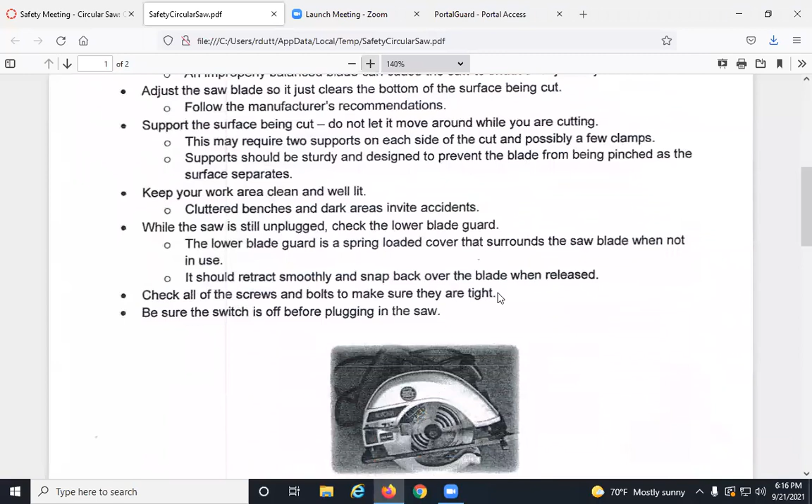Keep your work area clean and well lit. Cluttered benches and dark areas invite accidents. While the saw is still unplugged, check the lower blade guard. The lower blade guard is a spring-loaded cover that surrounds the saw blade when not in use. It should retract smoothly and snap back over the blade when released. Check all the screws and bolts to make sure they are tight. Be sure the switch is off before plugging the saw.

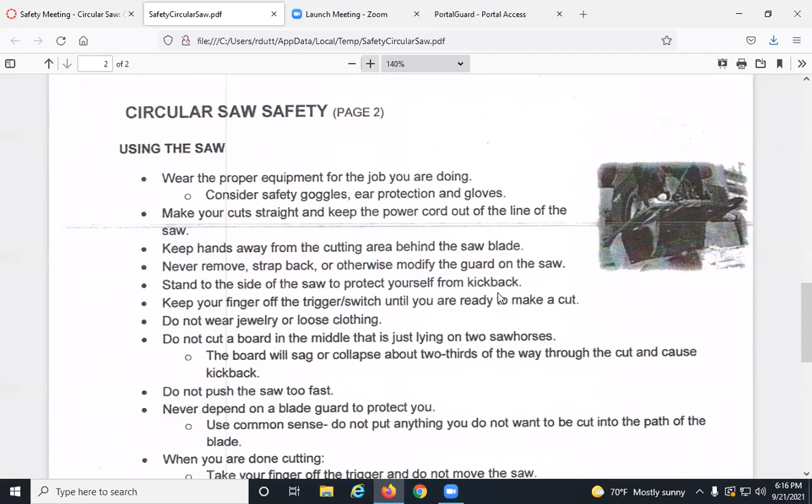Okay, how about Claire using the saw? Wear the proper equipment for the job you are doing. Consider safety goggles, ear protection, and gloves. Make your cuts straight and keep the power cord out of the line of the saw. Keep hands away from the cutting area behind the saw blade. Never remove, strap back, or otherwise modify the guard on the saw. Stand to the side of the saw to protect yourself from kickback. Keep your finger off the trigger or switch until you are ready to make a cut. Do not wear jewelry or loose clothing.

Okay, let's have somebody else. Evan: Do not cut a board in the middle that is just lying on 2 sawhorses. The board will sag or collapse about 2/3 of the way through the cut and cause kickback. Do not push the saw too fast. Never depend on a blade guard to protect you. Use common sense. Do not put anything you do not want cut into the path of the blade.

When you're done cutting, take your finger off the trigger and do not move the saw. Let the motor and the blade come to a complete stop. Never lift or move the saw from the cut while it's still running. Remember, the blade coasts to a stop after the switch is released. Be aware of the necessary time it takes for the blade to come to a complete stop, and don't let it brush up against you.

Okay, Tyler: Kickback. Kickback is a sudden reaction to a pinched, bound, or misaligned saw blade, which causes an uncontrolled saw to lift up and out of the workpiece towards the operator. If you feel resistance and notice the motor wind down, take the following steps: stop forward motion with your saw, release the trigger, and hold the saw steadily in place until the blade comes to a complete stop.

And in conclusion, in order to stay safe when using a circular saw, remember to use common sense. Properly prepare to use the saw and use the saw properly. Doing so will help you avoid dangers such as the consequences of kickback. It'll also help you work more efficiently and, with luck, keep your fingers on your hand where they belong. Lights, please.

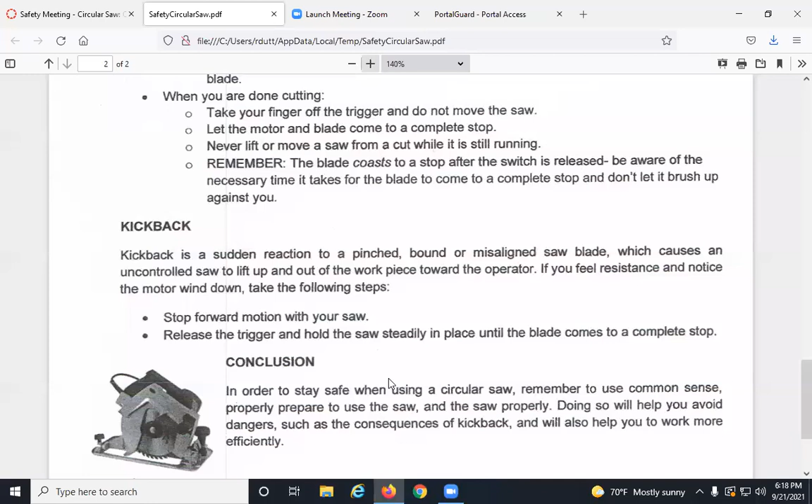So yeah, we could do a whole class on that saw. But the things I want you to remember, if you're not familiar with worm drive saws or circular saws...

This is a Skilsaw, and people call it that like tissues and Kleenex, right? It's just a brand of a 7¼ worm drive saw, heavier than all get out. It's kind of the standard in the industry.

Those Makitas, are they this heavy? I don't think they are. But anyway, don't peg your guard. So many guys put a shim, or tie a wire, or peg their guard, because you have to engage that guard when you're cutting something.

It might hinder the beginning of your cut slightly if you're not careful, so I usually peel it back when I start, and then when it gets going, I let it go. Never peg your guard, because by pegging your guard you've got a super dangerous condition.

Even if it's not plugged in, it's a condition where if you just brush yourself like that, you could really do horrible damage to yourself. And God forbid, because you're working down here a lot, and this is where your femoral artery is.

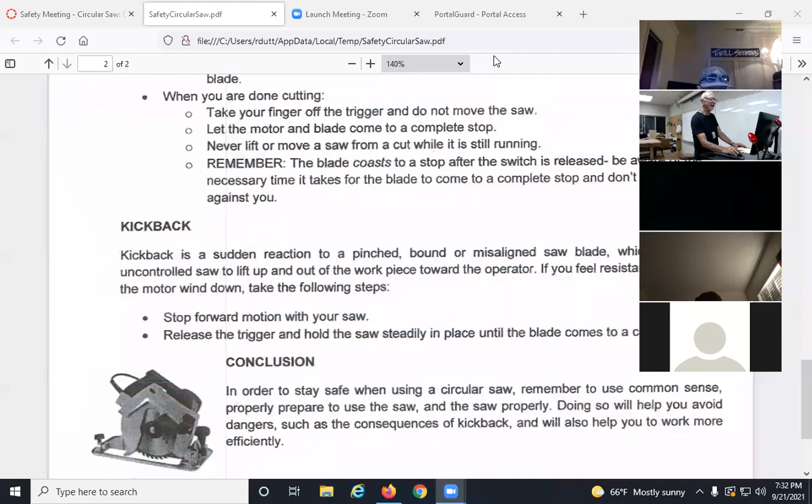Did you talk about it with Mike, who was here the other day? I did a little bit, but he doesn't really care. Yeah, he doesn't want to be involved, doesn't care at all. He just wants it done. Yeah, he wants it done. I think he's got enough on his plate.

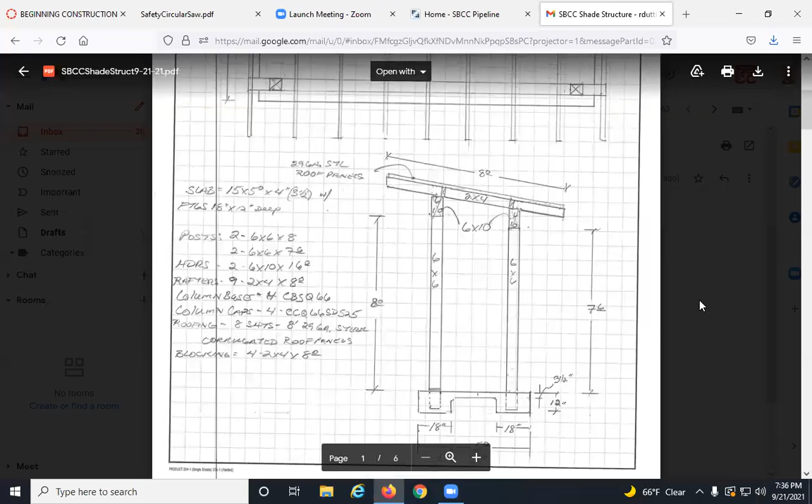I drew the slab 15 wide, by 5. The other things you see are 6 inches in, and 6 inches in is the start of a 6x6 post—6 inches in, 6 inches in, and I'd probably put a 6-inch dimension there if I didn't get to it already. I didn't show it there either, so yeah, I would flesh that out. Those are the 2x4 rafters, there's 9 of them, on approximately 2-foot centers, to use this corrugated metal roofing.

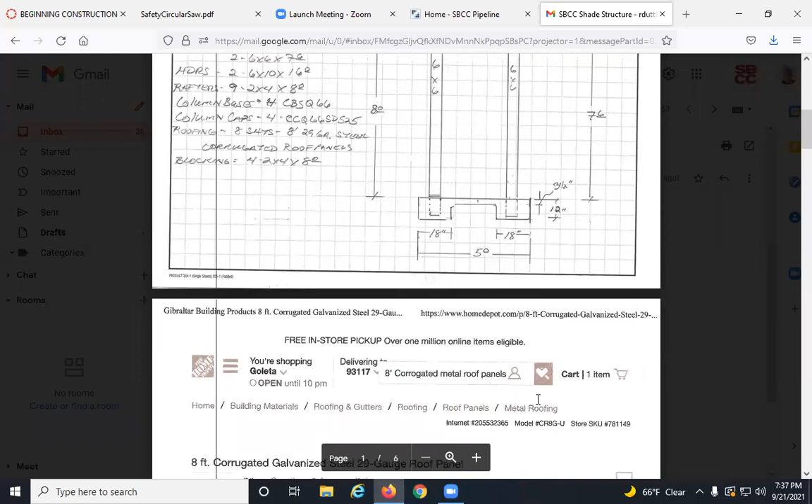I brought it in 6 inches, and the reason why I did that is 3 inches is the minimum for this embedment. So right there—I didn't draw them—but those posts, those 6x6 posts, would be fastened to the concrete with what's called a CB, or column base.

This is a CBSQ. And CBSQ is not that column base, but that column base. It's a CBSQ 66, SDS 2.5 for purposes of argument, and it's right down somewhere.

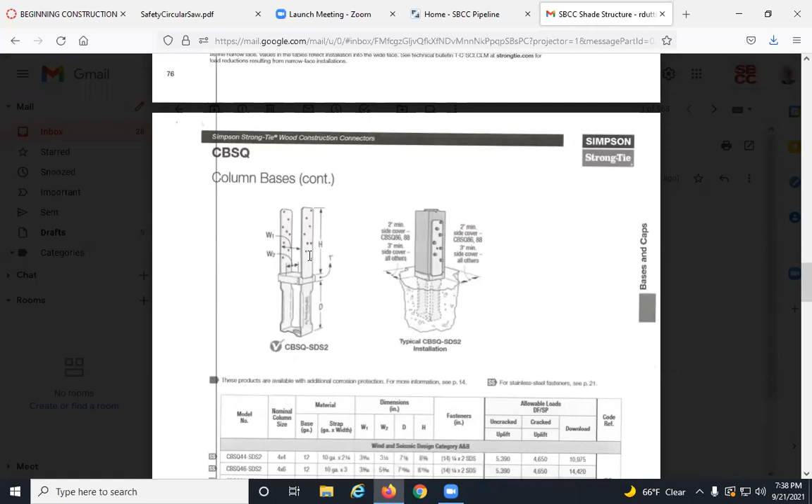This is an SD because this goes down into the concrete. It shows it there in the concrete, 3 inches minimum away from each edge of the slab. And then this flange, if you go down and read the H, that's the H dimension on the flange. It's up 8 3/4. So 8 3/4 up is this flange, and that flange is bolted to the 6x6 with SDS screws, as opposed to through bolts or lag bolts.

Through bolts go all the way through. So this CB, this column base right here, that's meant to be tacked and then through bolted. Same thing there, tacked - it's the same piece of hardware, and then through bolted. You could conceivably in a 6x6 run a couple of lags, 2.5-inch lags, from either side. You can run 2.5-inch lags, but it's really meant to be through bolted.

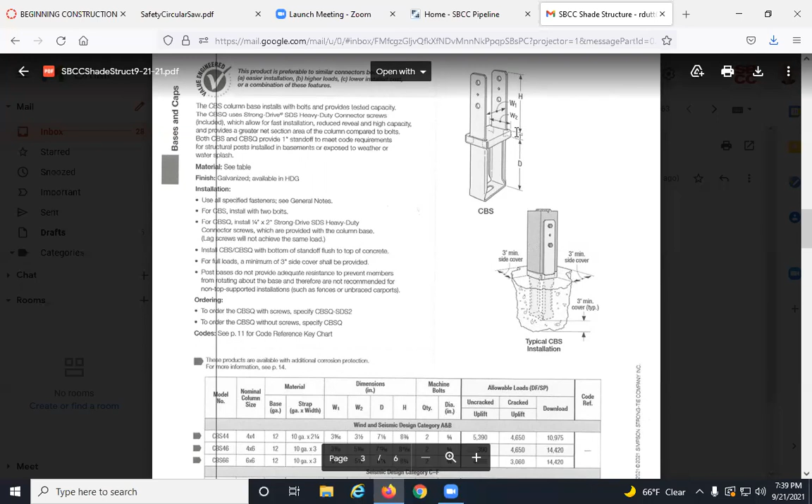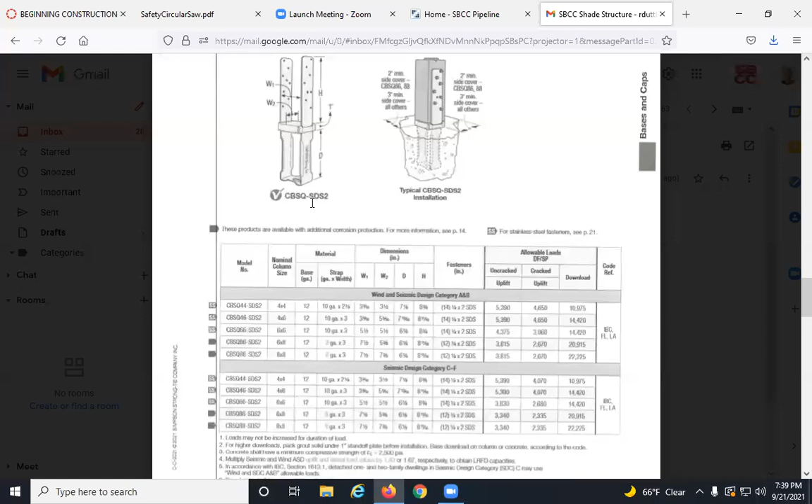But for the same strength, or really more, you can get the CBSQ 66 SDS2, which takes these SDS screws. You just drive them with an impact driver, a good driver. You don't have to pilot them. You just drive them right into your wood, and then specify the screws - you take 14, 1/4 x 2 SDS screws.

So from a lag bolt to an SDS screw, the lag bolt is bigger. A lag bolt's going to be considerably bigger, probably 1/2 inch. That hole right there is the one you'd put a through bolt or lag in - probably for a 1/2 inch bolt, could be a 5/8 bolt. So it's much bigger - a much bigger pilot hole, much more torque to crank that in, and then you've got 2 points of purchase on there.

The best way to do it would be a through bolt - to bore all the way through, and then put a hex-headed bolt, a machine bolt with a washer or not, and a nut and a washer on the backside of it. That would be the strongest connection.

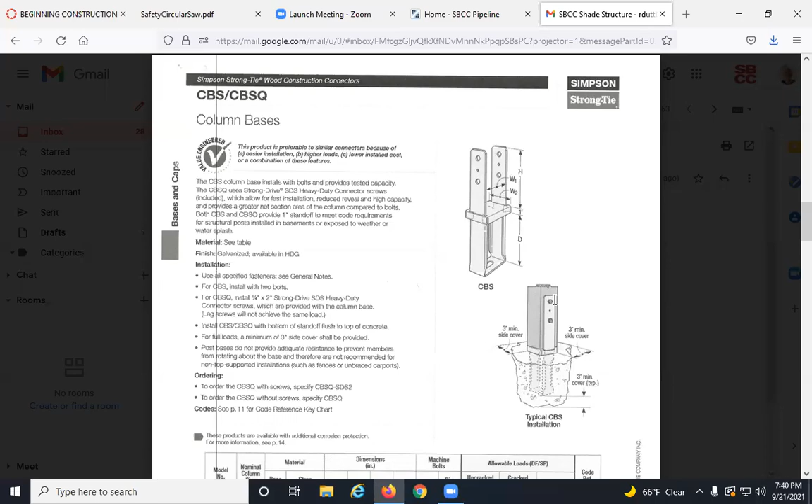Simpson might argue that - the engineering might say I'm wrong on that, and that this is a strong connection because this is what they're pushing now. They're pushing the SDS screws, and as you can see, 14 of them go in there.

So the whole thing is that marries that column, that 6x6 post sits on. See, this plate is flush with the slab, and this metal right here sits above the slab. So your post is not sitting on the slab, it's not on the grade - it's sitting on a piece of metal off grade, and it's anchored.

This post column base is down in the concrete, whatever it is, the D dimension - it's 5.5, 6 1/4 down in the concrete, surrounded by concrete, and then the post is married to it with 14 SDS screws. It's really married to it. So it really marries the column to the column base, which is married to the slab. So it marries your column to the slab, big time.

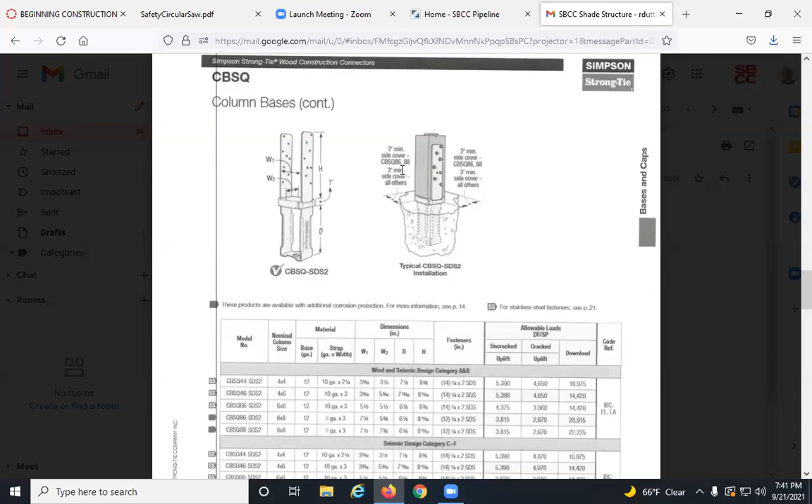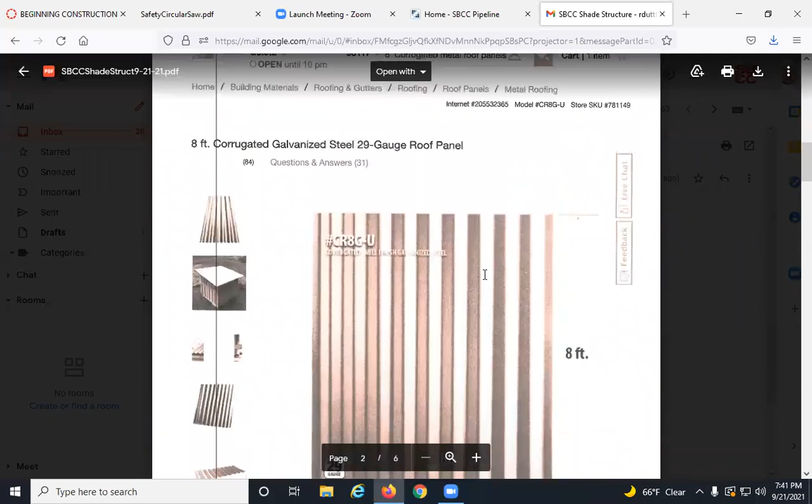Because by the time we get this roof on - a solid roof, this sheet metal roof, steel colored corrugated roof, 8-foot panels, would take 8 of them to do the whole thing - you're gonna have a pretty decent sail there. So when a good gust of wind comes off the harbor, it's gonna be coming just like this too.

So wait, we're gonna do the other one. We're gonna shed it off the back. Yeah, okay, well, that's cool. That's cool. But at any rate, then the wind would be coming off the harbor like this, a good gust of wind, there's gonna be a lot of resistance right there.

It's gonna be, everything's gonna want to be really well anchored. And so these 6x10 headers, which are carrying 2x4 roof rafters, which are blocked in between, so we can nail them - they'll be toenailed and then A35s.

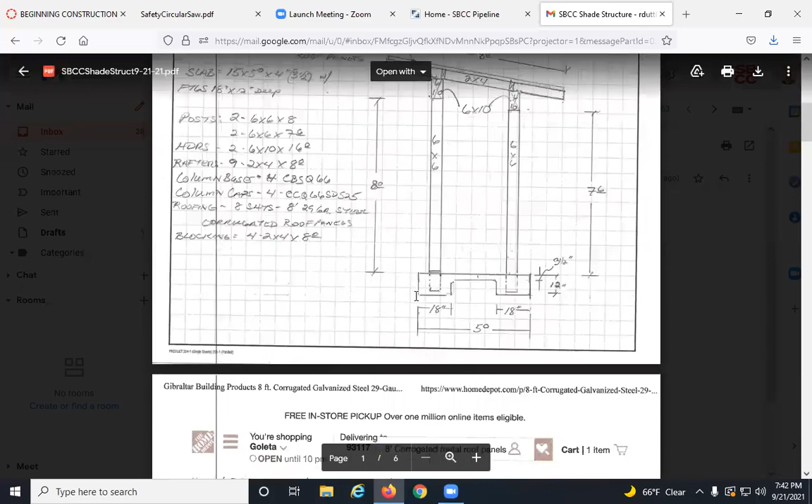I haven't kind of fleshed it out, but they're anchored with what's called a CC, or column cap. That's the column cap, and that is the column cap we would be using right there, except it'd be a 66 SDS. So it'd be this guy right here - it'd be a CCQ 66 SDS.

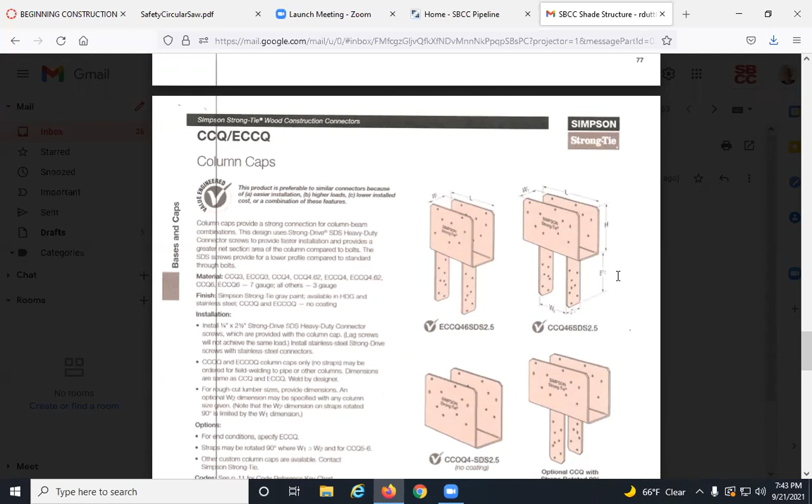That slips down over the post, and the header goes through that. And that marries the header to the post with SDS screws, lots of them. What, 1, 2, 3, 4, 5, 6, 7, 14 on this guy, and 4, 5, 20 on that guy. There's the guy we'd use.

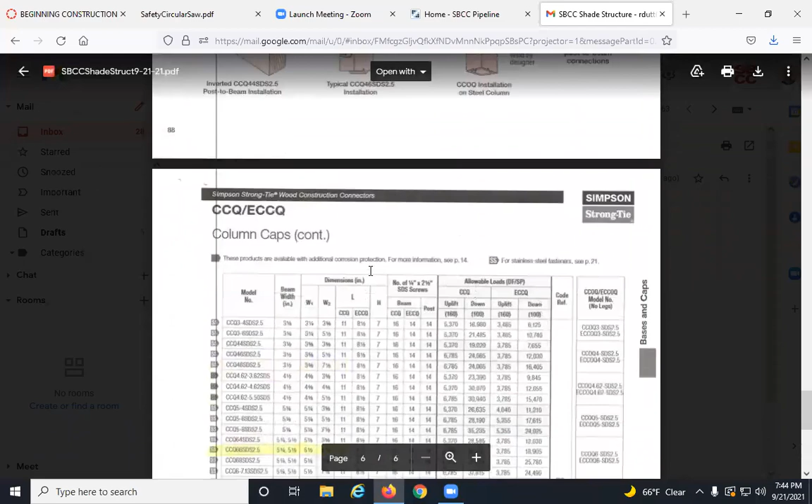Tells you all the specs on it, so you know what you're getting. Pretty sure Hayward stocks these.

So we're using a Simpson column base to support and marry the columns to the slab, and then up here on the headers, we're going to use a Simpson column cap to support the headers.

And then these guys will just lay across and roll over and toenail, and then block in between. And then we'll put A35 clips. If I went to the Simpson catalog, I could show you an A35 clip, but it's a clip that turns over and nails the rafter to the header. Shear clip. So we use a lot of Simpson galvanized hardware.

I think the column caps are galvanized, so they're going to do well against the weather. They also paint up great. They'll lock everything together without a whole lot of nails. Makes it pretty clean. And then I just did an 8-foot 2x roof with big eaves, so it'd be shade on.

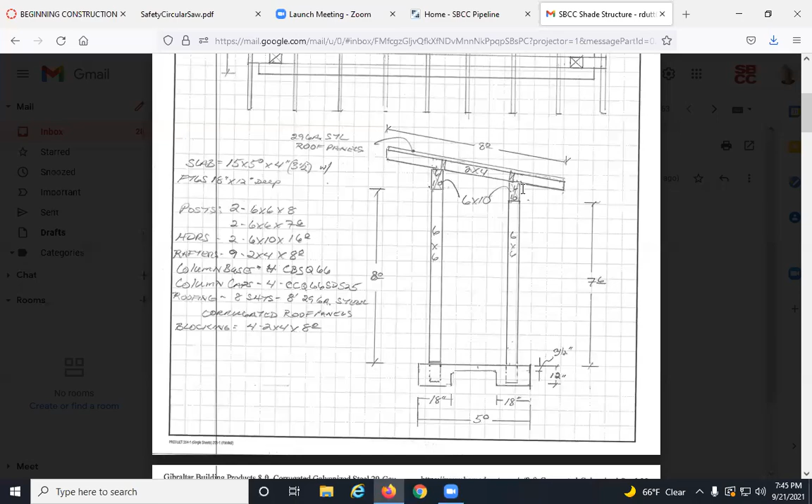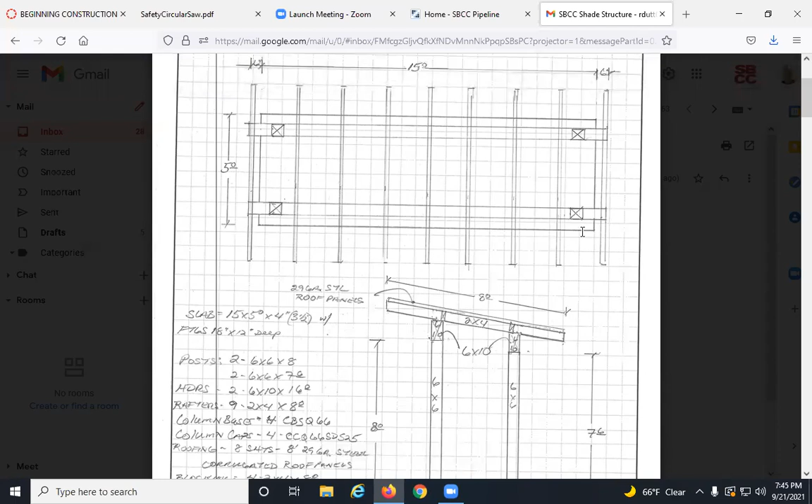As you can see, if you look at a down view of this, the slab is 5 feet, basically 8 foot. It's on the rake, so it's a little bit less than 8 foot because it's on an angle, and 8 foot on the flat. But it's not much of a rake, so the cantilever is about 1.5 feet on either side of the shade past that. And it's actually even more than that because that's 6 inches in, so it's a 2-foot cantilever either side.

It's going to be plumbed into our graywater system to do washing of plantings and plants, and all the stuff to do with plants—harvesting vegetables, washing vegetables, a vegetable washing sink. And it'll give them shade to stand under, and it'll shade the sink.

And that's just, again, based on your 5 foot, 15 foot, right? It's not what I would have come up with. I would have built a bigger structure. In other words, if I'm going to build a structure, I want to build a bigger one. Right, why not? Let's face it.

But you guys are running this thing, so I have hard copies that I'm going to hang on to, but I'll email this to you and just show you guys and see if this works. Or do you want to make it bigger? Do you want to make it wider? Do you want to shrink it? Do you like it at all?

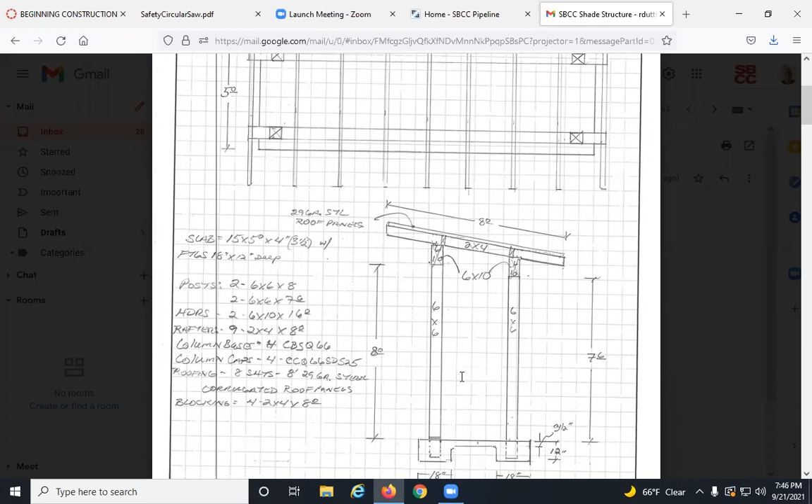I drew this to scale, and by drawing it to scale I basically built it—built it each block. I figured out the span of the headers, the size of the posts I wanted, the size of the column caps and column bases. I figured everything out with a 0.7mm pencil, 1/4 inch graph paper, a scale rule, and a 30-60 triangle.

And now, once I've got a plan, anybody can bid this, but nobody's going to bid it because it's all going to be built probably by us. So we'll be able to take this, hopefully, take this cut list.

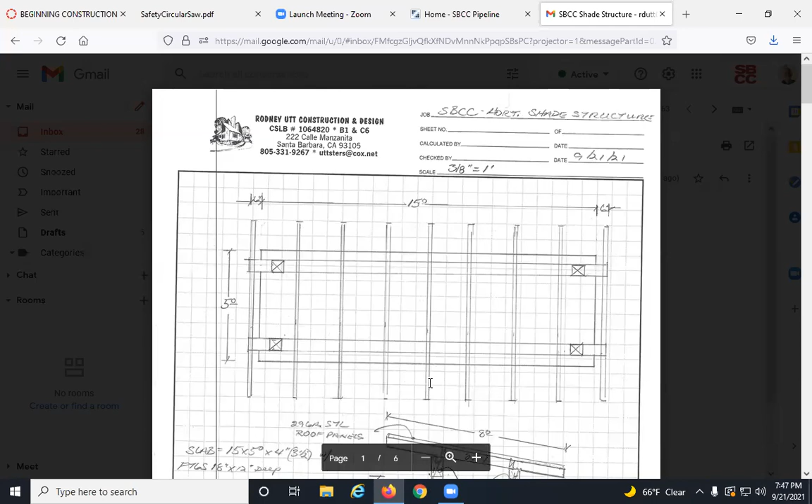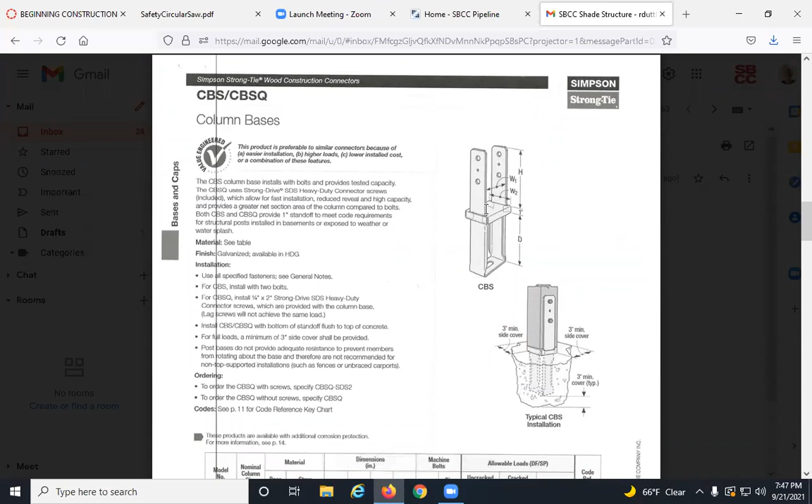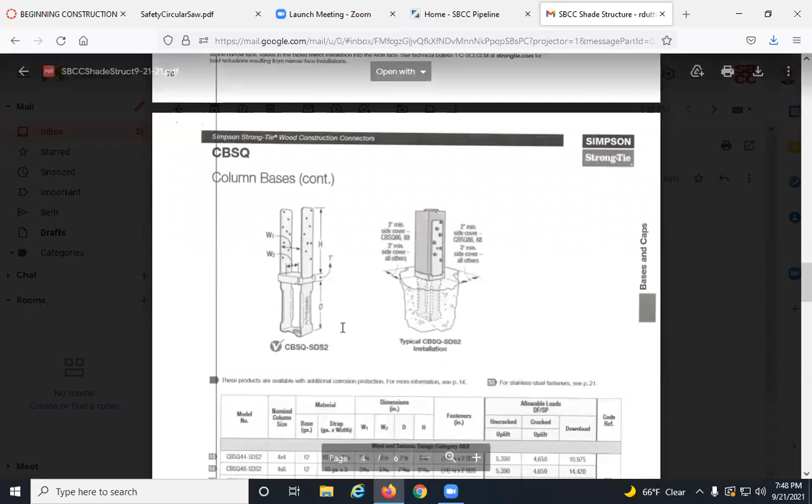If they do their slab right, or however they do their slab, as long as these points—there, there, there, and there—as long as they're actually there, as long as that top piece of metal is dead level, we're golden. Even if it's slightly off a 16th or an 8th, it doesn't matter much. It's certainly well within everybody's skill level, I think, to get that thing dead level.

And with that being the case, we should be able to cut our—oh, by the way, Lewis—so the footings, 18-inch wide footing by 12-inch deep, 18-inch square by 12 deep just at the corners, 12 deep with concrete. That's to get the column bases.

That's where the weight is. The rest of the slab is fine at 3.5 inches. If we do a thickened edge, which is what we typically do, we just make a little trough so it's a little thicker at the outside edges—just for those 4 points, the 4 corners, that's all I need. The rest is just 4 inches. You just need the footings where that load is, and then everything's tied together.

The whole slab is all tied in with steel. How do you set the column bases? Do you drive a stake through the bottom of them? I saw a little slit on the bottom. No, you can bed them in wet concrete.

You can stake them with rebar, and then pour up to them, but I like to bed them in wet concrete. If the concrete's good and wet, you get them right down on top of it. You can do your finishing, do all your screeding, and then get them in there.

So you get that bottom set, and then pour the rest. Well, the rest is already poured. You poured the whole slab, right? You poured those slabs, and there's nothing in the corners.

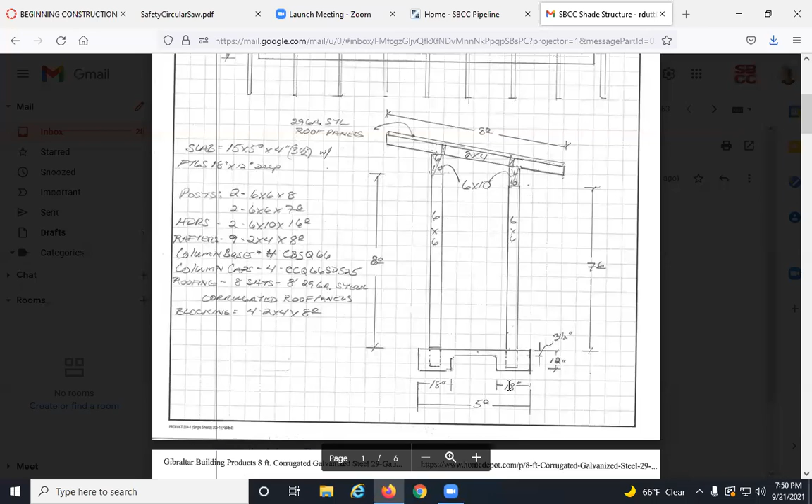An 18 by 18 by 12-inch deep footing gives us a footing for the column bases. If that's done right, level, and it would help if it's done square too—we'll talk a little bit about square, let's have some time tonight to talk about square.

Then we can just cut in here. We can have a lumber drop here, set up outside with lights, and cut all this stuff. We can basically make this thing a kit—cut our two 6x6 posts by 8,

two 6x6 posts by 7.6, 6 inches, whatever this span is, 5 feet. We're dropping 6 inches, so I think that gives us something like a 3 and 12 pitch. Plenty of pitch—we could do less pitch.

How did you pick your heights and sizes? I'm sorry, how did you pick your heights and sizes and roof boards—nominal boards, 8 foot, right? An 8 foot board, 7.6 I can cut out. Nominal, and also knowing 8 foot is a typical ceiling height—at 8 foot you can walk underneath this, and at 7.6 you can definitely walk underneath it too.

You want it high for tall people carrying stuff—it doesn't need to feel cramped, and then you can hang stuff from the rafters, hang herbs and things you're drying from the rafters, you can do all kinds of stuff. This would be a cool little structure, but we should be able to cut all 4 posts exact.

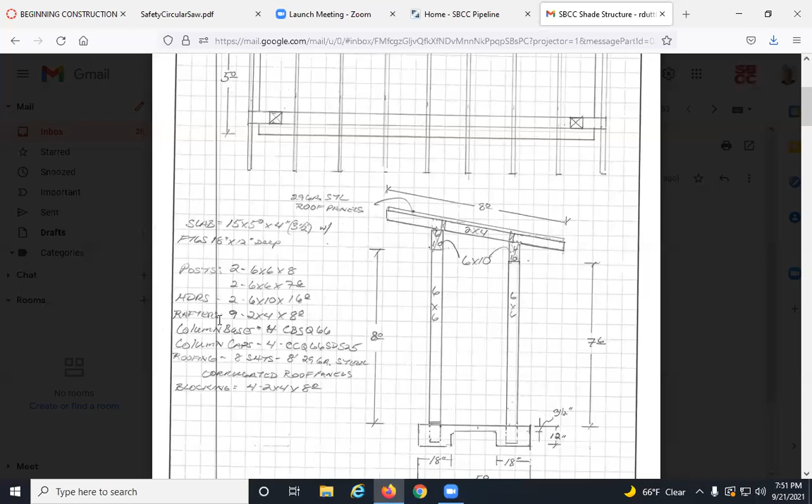Then our 9 2x4 rafters, and I forgot—down here we also need 4 2x4s by 8 foot to do blocking, what we call freeze blocking. And then there's our column bases, 4 of them, column caps, 4 of them, roofing—8 sheets—and there's the roofing.

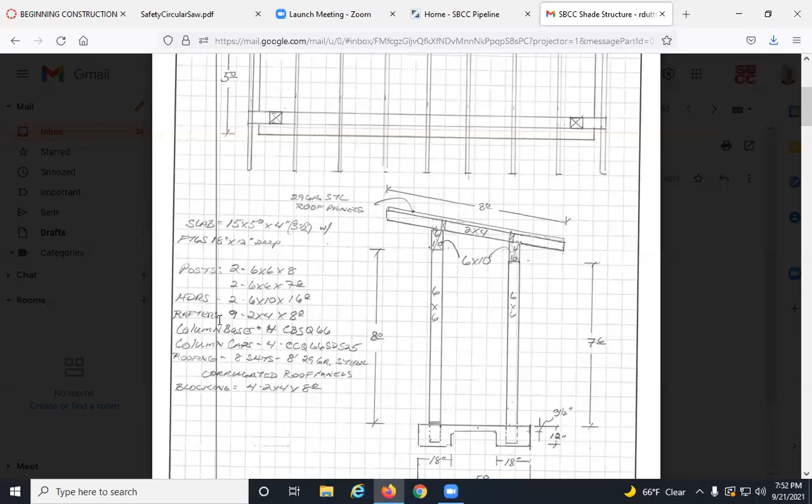So I designed this based on material, 2-foot centers. Look for some roofing material like this—I like the idea of steel, it helps with being a bit reflective. All the polycarbonate stuff wasn't going to completely shade it, but this is complete shade.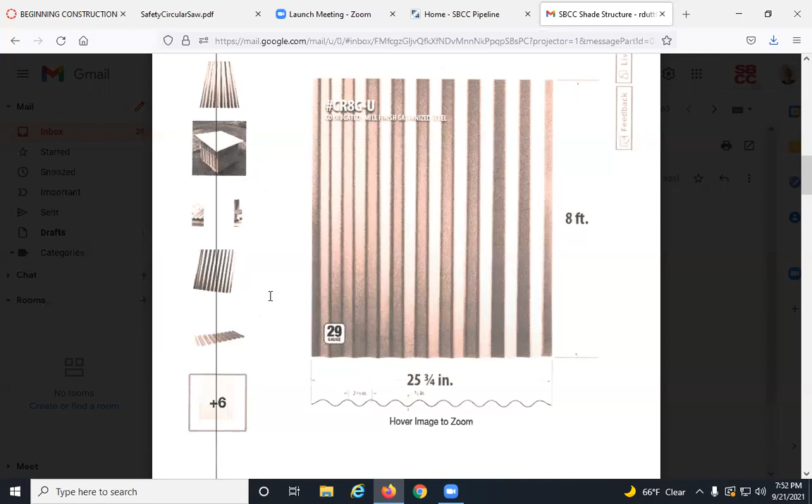I was a little confused about the blocking—what exactly? Okay, so it's called frieze block, F-R-I-E-Z-E, and the blocking keeps these guys from rolling over, right?

So between each one of these is a block, and it's going to follow its square—so we use a 2x4 block. It won't be a plumb block, this will be a square block. With the frieze block, you might be cutting or ripping the top of one, but this guy will just sit plumb and it'll allow us to nail them together. It'll keep them from collapsing—that's pretty much what it does.

And it also keeps the wind from whistling on through it, so it stops the wind from—I could have hung these in between, but I really wanted an eave. There are a lot of ways this could have been done.

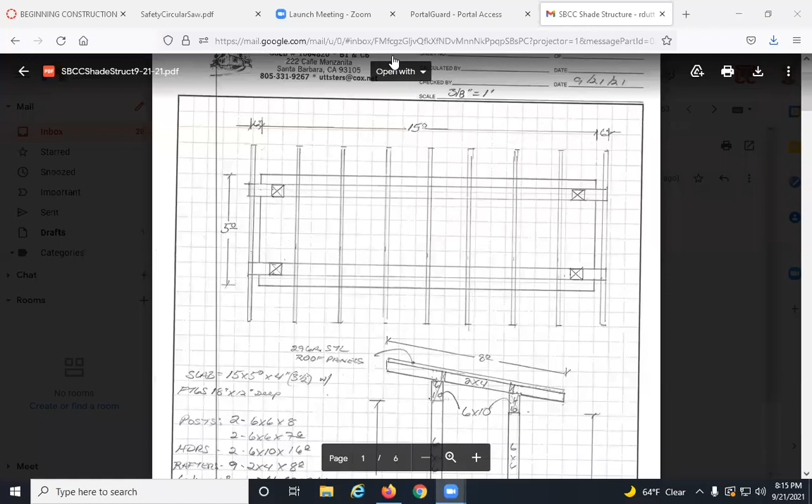Yeah, it's for my wife. I'm sorry honey, can I have the car? No, but I thought you bought me a car. Yeah, I know, you don't have to drive my car.

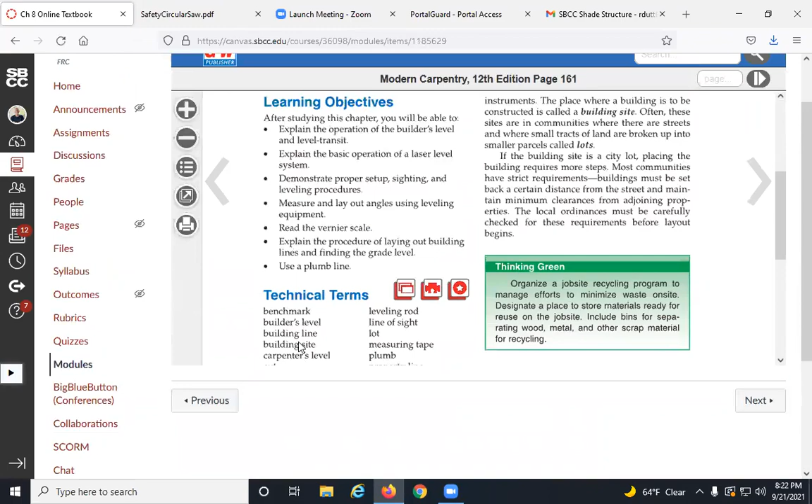Plot plans, we talked about that, establishing building lines. Your lot, if you're going to build off a lot, get it surveyed. And if you get your lot surveyed, or if you have an older survey that you can locate your monuments, that's what these are. There's monuments in those corners, that's what surveyors find. And they go off those monuments to determine your property line, by stakes and put numbers on them and stuff like that. But what we like to do before I build is I like to have the property surveyed, and I like to get my building corner done by the surveyor.

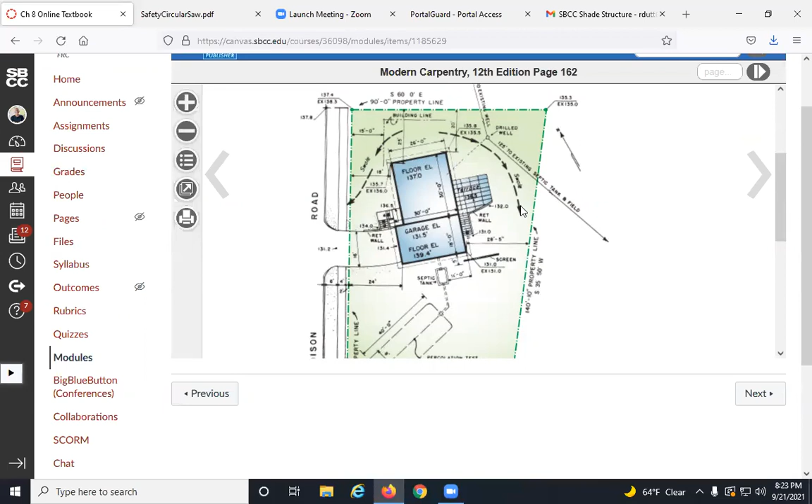It's the way to go. It just takes the onus off the builder and puts it on the surveyor. It's kind of like, I can change my own oil, why would I? And I can lay out my own building, but why would I when a surveyor, that's all he does. So if I can afford it, if it's part of my budget, I'm going to include having a surveyor do my building lines. If it's a good sized building. If it's something small, then that's a no brainer. But this is a big building. If you had just had this unimproved lot, I would have the surveyor lay that out in a heartbeat. I'd have him lay that out.

Tapes, right? We talked about setbacks. When you lay out a building anywhere, you got to be aware of the setbacks. They're different from county to county, even city to city. Ours are generally 6 foot side yard setbacks, 6 foot setback in the backyard, but sometimes you go to 10, 6 to 10, and then front yard setbacks are generally 20 feet. And then there are setbacks where you can put a fence or a hedge. Within 6 feet of the street, you can only put a 4.5 foot high fence or hedge. 6 feet back, you can go 6 feet. And those are all our county stuff.

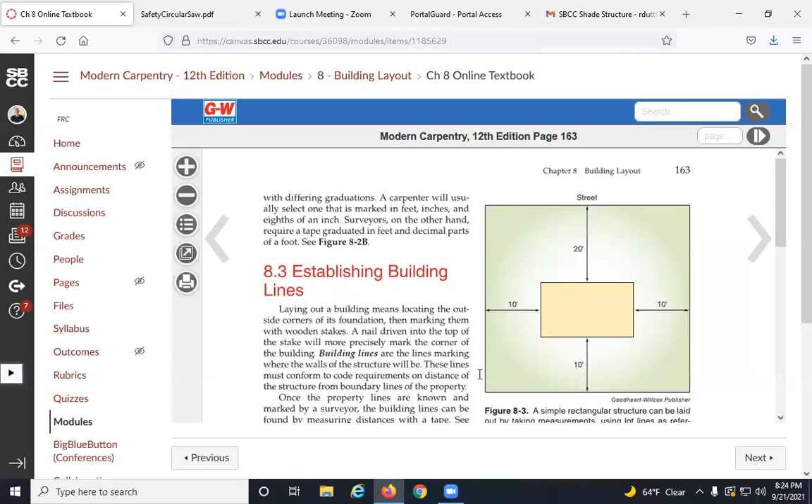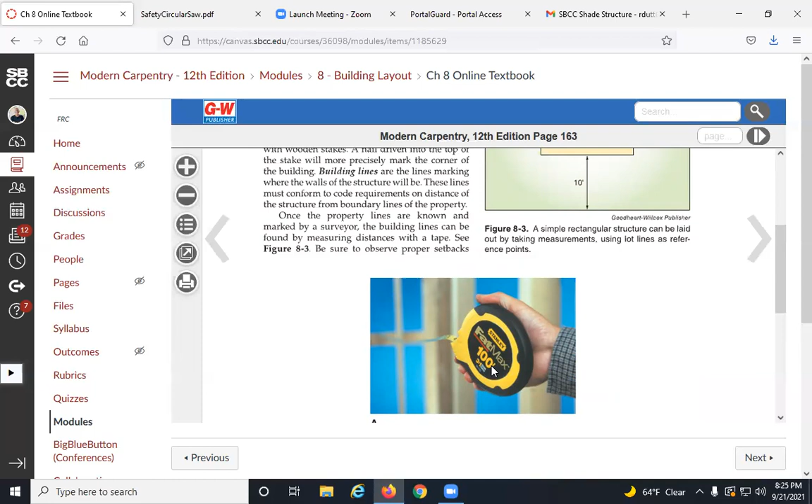And then tape, this is a 100-foot tape. This is besides a 25-foot tape measure. I prefer Stanley, unless you know why, because I like 3 inches - you have to add 3 inches when you do an inside measurement. This is a good little Lufkin 100-footer. It usually serves most all layout. I rarely have to lay out anything over 100, and if I do, I can double it up. It's a good thing to have, a 100-foot tape. They're relatively cheap, $15 to $20 maybe.

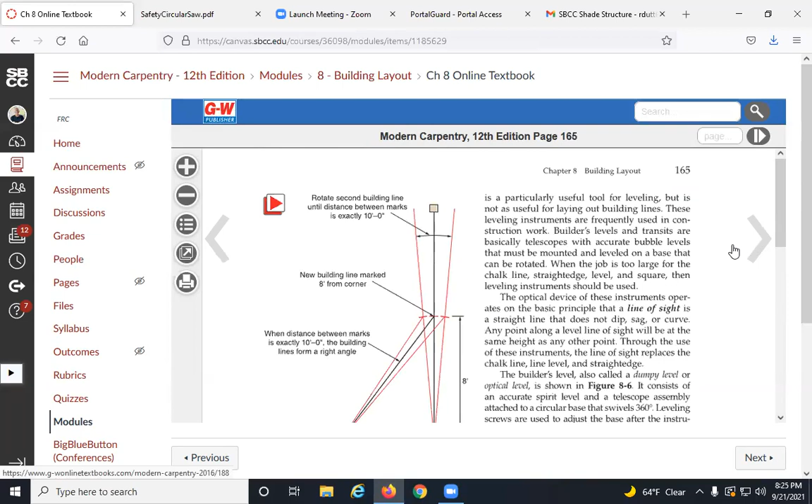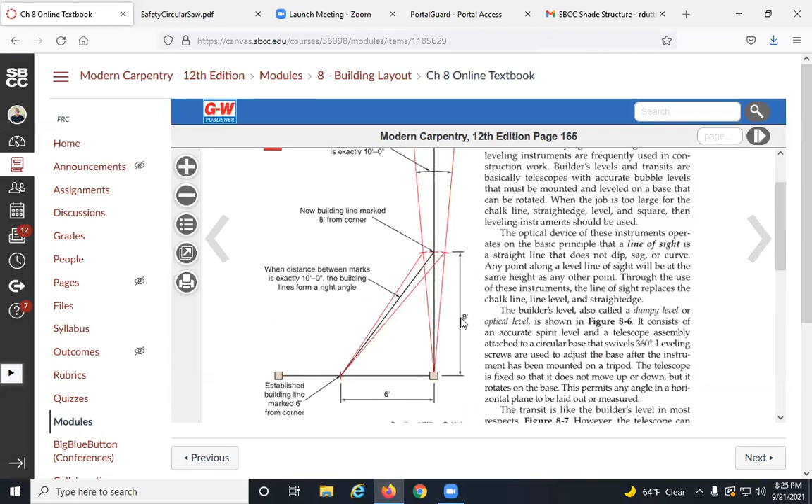What's that say? Who knows what that is? Does everybody know what it is? If I remember correctly, it's to calculate the hypotenuse of a triangle. Yeah, it has to do with the hypotenuse, A squared, triangle. A squared plus B squared equals C squared. Yes, right. It's essentially the principle behind the right triangle, or 90 degree, the right angle.

To check square, especially in a building layout, we use 3, 4, 5, or the Pythagorean theorem, a lot. Pythagorean theorem is A squared plus B squared equals C squared. There's other ways to say it, square root of... just suffice to say that we call it a 3, 4, 5 triangle because 3, 4, 5, or 3, 4, 5 - doesn't really matter which is 3, which is 4 here.

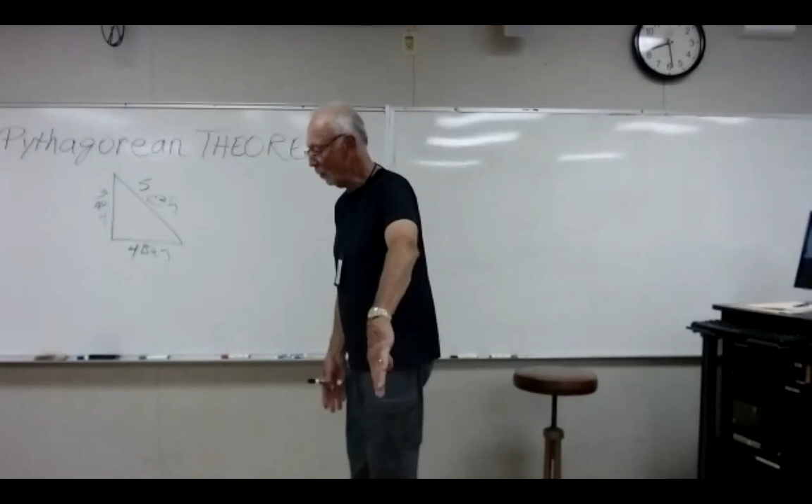We want an exact 90 degrees, right? So we kind of eyeball the 90-degree line and pull it out of ways, and we drop a stake or a batter board. But we want to be able to move one of these lines, the one that we're trying to get squared up. So let's say we've established this as the line. This is our line. This plane is a straight line, and then we want a perpendicular line going this way.

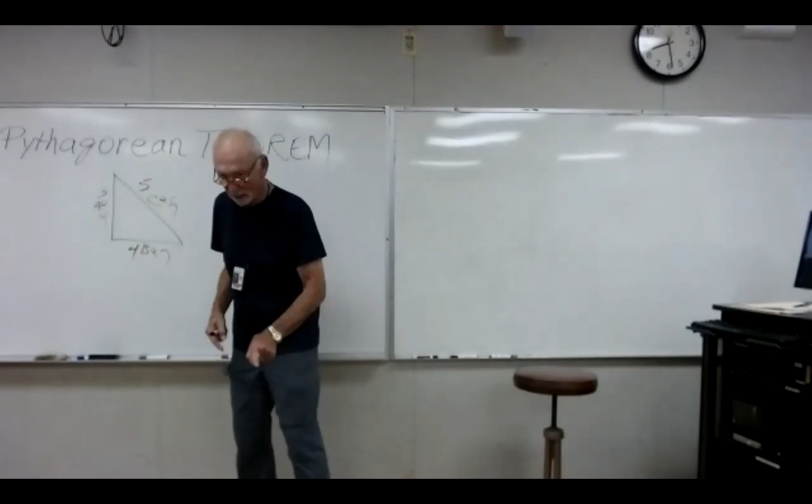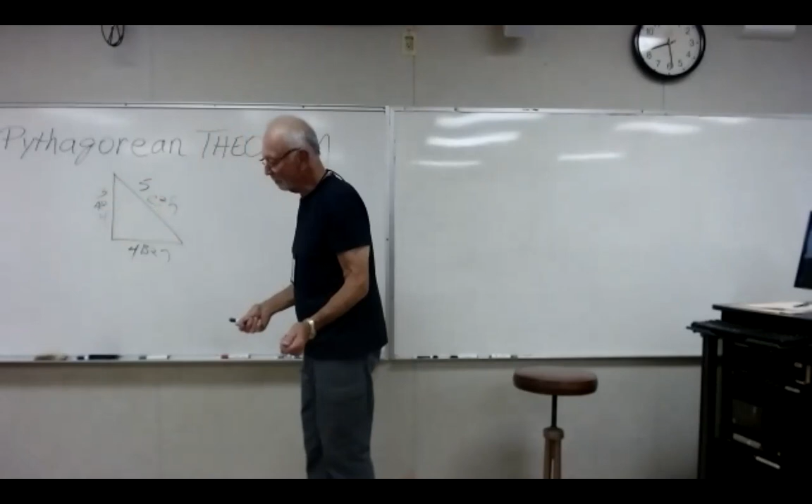So we pull a string. We got a guy holding the string, and we got this one staked, wrapped around a stake, and we got it pulled and staked. It's nice and taut. And that's off that plane. We know that's our plane. Now we just want a 90 degree. So we can come up with what we think is 90 degrees and run it out there, and have somebody hold it, or have batter boards.

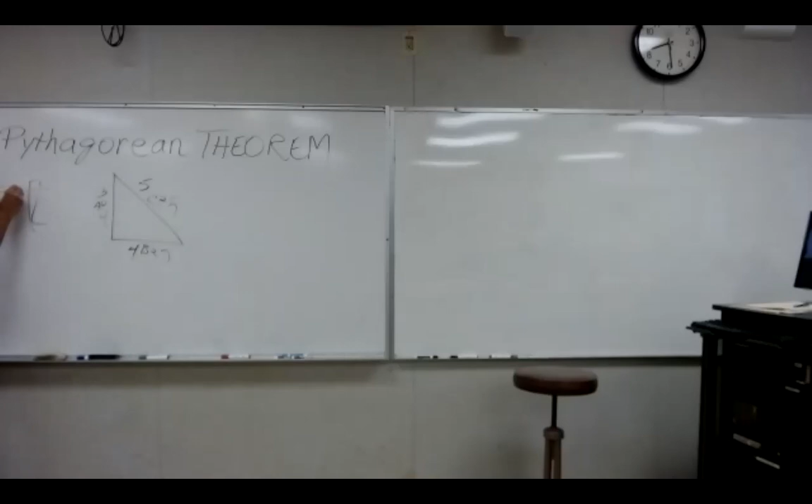Batter boards are a stake, nailed in between, and then you can bring a string over it and tie it to it. Put a notch in it. You can make marks on a batter board. So you got your string going over a batter board.

Farther than you know you're going to go. So you're going to go 30 feet - you're out there 35 feet with your batter board. You can pull your string past. You just need to get that perpendicular. And all you need to do then is anchor that string in what you think is perpendicular, what you think is 90 degrees, right? That's anchored. This is dead anchored. It's wrapped around. It's not going to move. This one is not going to move for now.

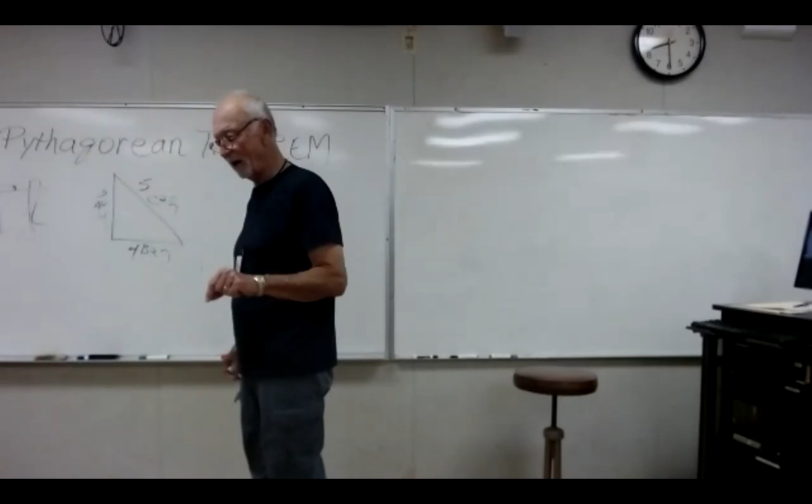And then you take your Sharpie and you run out here 15 feet, right? 15 feet. And then you run out here because - let's use 5 - 5 times 3 is 15 feet. And now we're going to go to the 4, so 5 times 4 is 20. So we run out there 15, run out here 20, right? And then this needs to be 25. You guys get that? Yeah, sorry, I know I confused some of you.

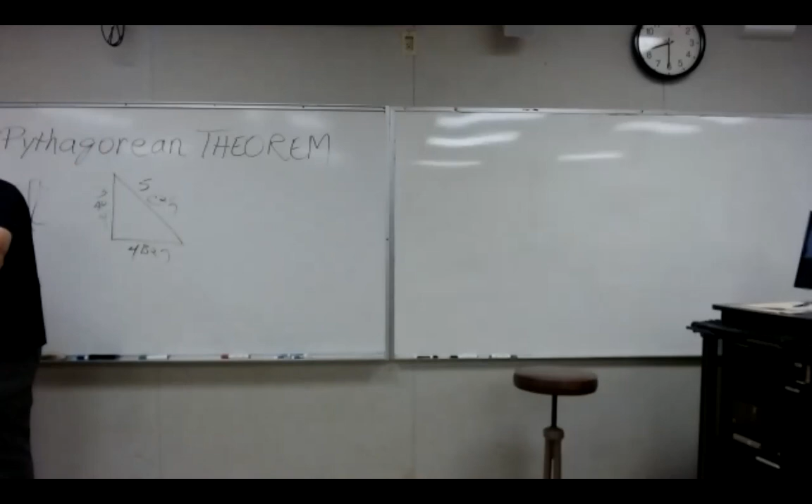If you run out 3 feet and 4 feet and connect the dots, when you hold your tape on that mark on this one and bring it over to here, it should read 5 feet. And if it doesn't read 5 feet, you're going to move that until it does. So you can see how if you're running a 30 or 40 foot run out here on a 30-foot line, you don't want to do a 3, 4, 5 - you want to go out further. You don't want to make any mistakes on that. So I would go out and use a factor of 5, right?

So on the 3, 4, 5 triangle, 3 times 5 is 15 feet that way, 5 times 4 is 20 feet that way, and then 5 times 5, you need to have 25. So you'd have a tape like this, or a tape like this.

You have a guy holding on 1, and you're over here holding on 25, and you or someone is manipulating that string until you have exactly 25 feet. So it's around that way, 15, 20, 25, which is the same as 3, 4, 5. And the minute that thing comes into reading 25, you have a perfectly square right triangle corner.

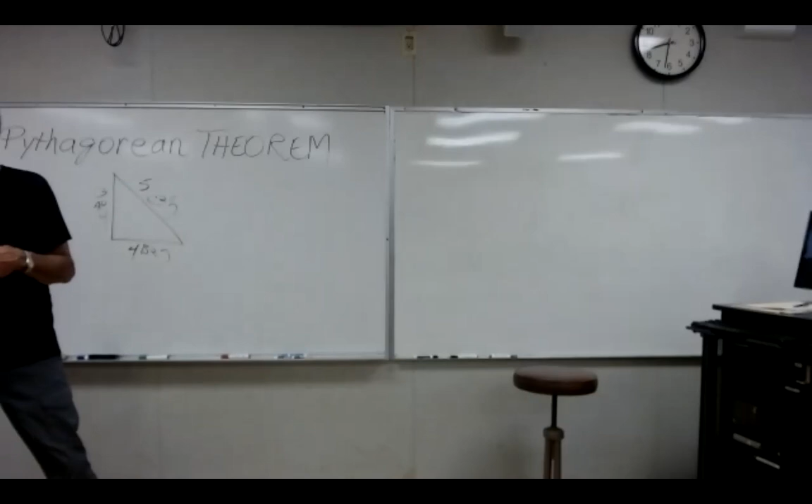Do the same thing that way, do it 3, 4, 5 that way, and move that guy until it's dead on. You get the hypotenuse right, you get that 3, that 4, that 5, however you do it. Then nail that one and stake it as far as you want to go, then come over square and do it again to that. Now you should have a square building, right? You should have square lines laid out for your platform.

How can you check that? We do the cross, you go from corner, make the X, and the X should be the same. You can't put a framing square on it, it's not enough for a 50 by 30, there's no way. So to check yourself for square, once you've done the 3, 4, 5s,

rotate, pull it taut as heck from corner to corner. If it's square, it'll be the exact same number. If it's not square, it won't be the exact same number. If those numbers are off, you are not square.

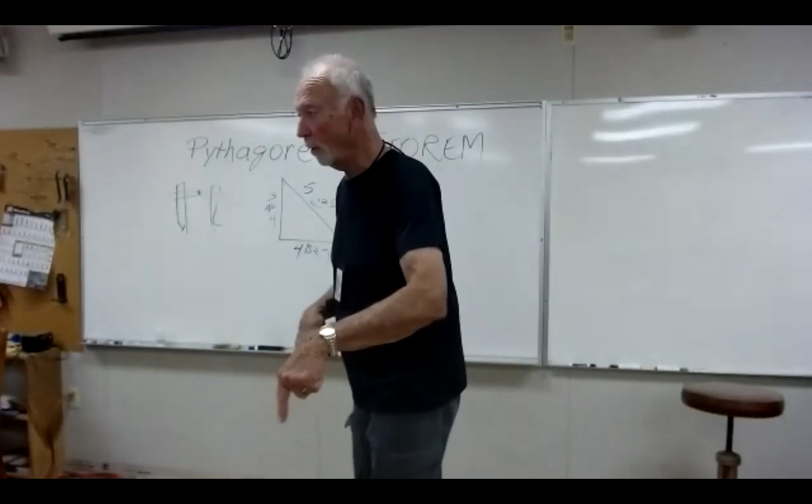Now, in a 30 by 50 run, if you're off like a 16th or an 8th, I'm going to call it square. In a 4 by 4, 5 by 5, 6 by 6, 7 by 7, or 8 by 8, I'm not calling it square until it's dead on. Bigger, we can be a 16th out of square in 150 square feet, or in that case, 1,500 square feet.

So do you have any questions on the Pythagorean theorem, on the 3, 4, 5 triangle? You can use that 3, 4, 5 triangle on anything, but it's especially handy for laying out.

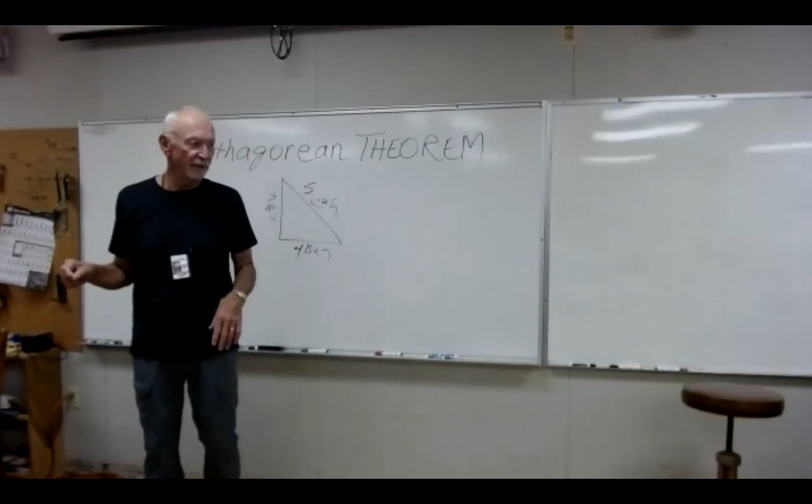Now, I'll finish with this, I'll tell you guys this little anecdote and let you go. But when we laid out the book building, everything was square. There were very few things that were actually square in the footings we were laying, but everything was square to the XYZ coordinate.

So I had surveyed the X coordinate, which is due north-south as surveyor layout, and the Y coordinate, which is due east-west. They crossed exactly 90 degrees to each other. And then the Z coordinate was the level of sea level at a certain control point.

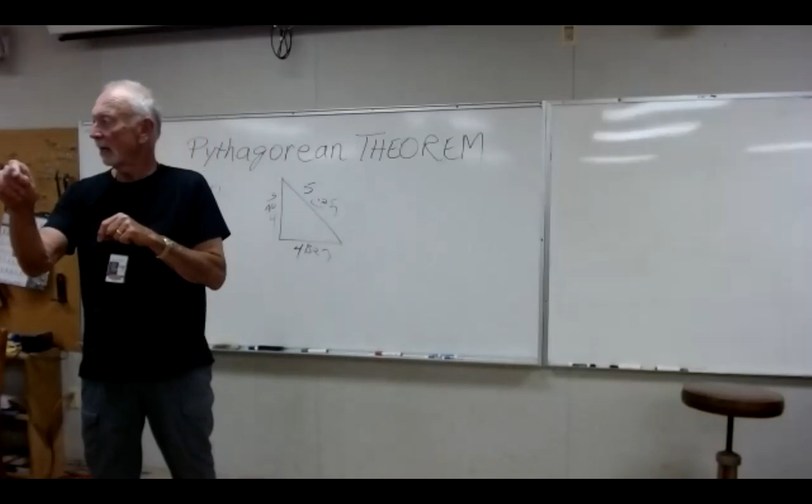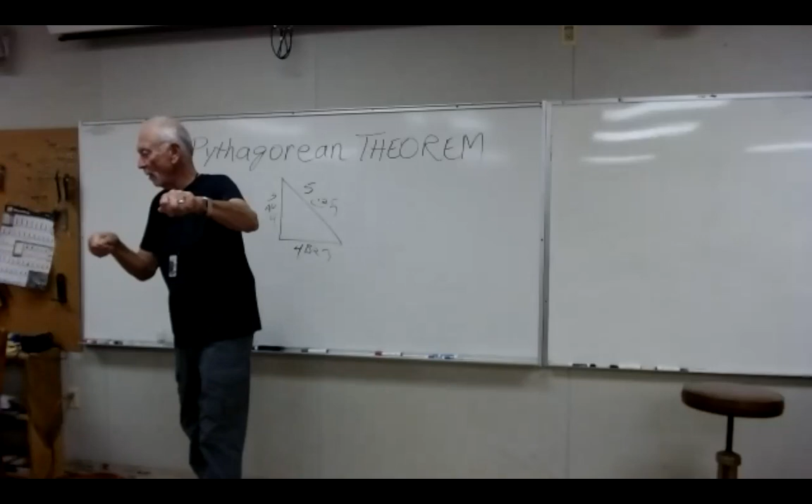There were 21 load points throughout, but they were all laid out on the 3, 4, 5. So from the control point, it was X amount on the, say, 9 foot 9 and 9/16 on the X, and then you 3, 4, 5 and go the next number, 8 or whatever it was, on the Y, and that was an established point. That's how we laid out every point in the place, all the 21 load points, and then tied together all the footings, but all 3, 4, 5.

So the Pythagorean theorem, that 3, 4, 5 triangle, is used extensively in building layouts. That's how we find these larger buildings on larger lots, and we find their corners to be square, how we make their corners square.

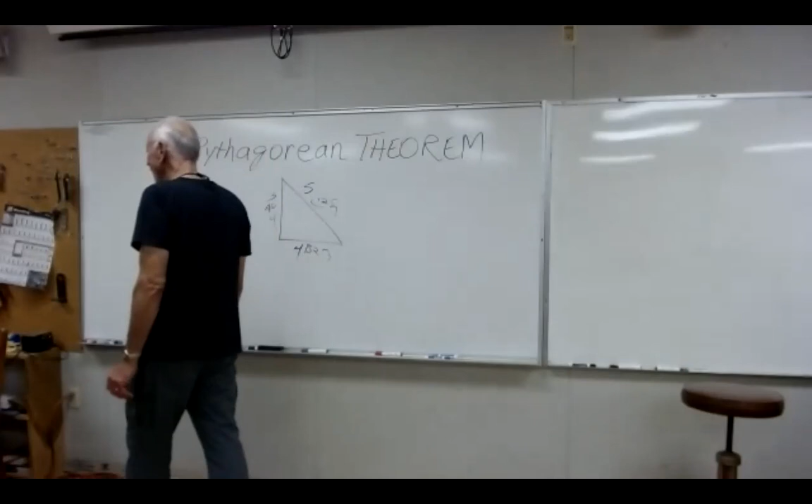So survey here, all of you who would like to get an A in the class, raise your hand. Okay, survey's done. I knew it was gonna work out.

So here's the survey, a show of hands if next semester you were to take the 111 class, which is intermediate construction, going a little deeper into construction, more into finishes and things like that.

Would you prefer to have the lab from 8 to noon on Saturday, or would you prefer Thursday night, same time, 6 to 10? So, 8 to noon on Saturday, show of hands. One, two... okay, so two, and the rest of you are for Thursday evening?

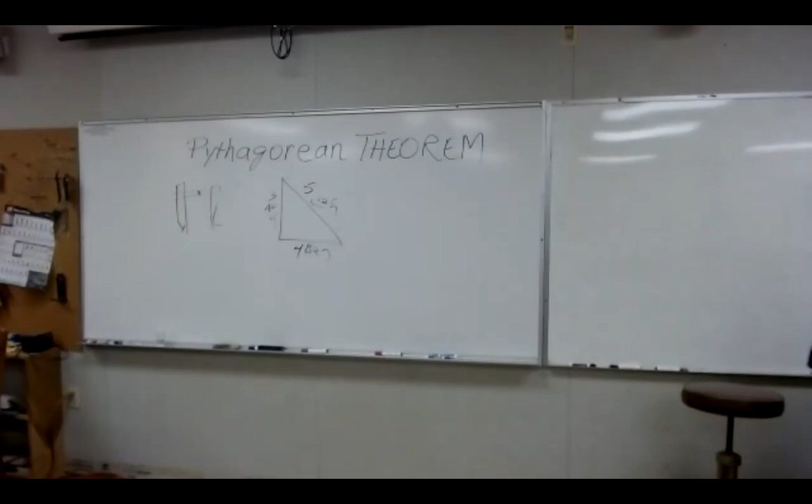And how about you guys at home? I didn't hear everybody chime in. Which would you prefer? Probably Thursday. Anybody prefer Saturday, 8 to 12? No? Okay, so it sounds like the preference is in the evening.

Now, Jim's thing is that he wants to teach it, but he doesn't want to teach it in the evening, he's got a conflict. He wants to teach it Saturdays, and the point is you could do a lot more hands-on outside during the day on Saturday morning. So we'll present it to you again. Personally, I play golf on Saturdays, so I don't want to teach it. Every time I have time on Saturdays, I try to get it done and race off to tee time and make it work, so I try not to do that, but life's in flux.